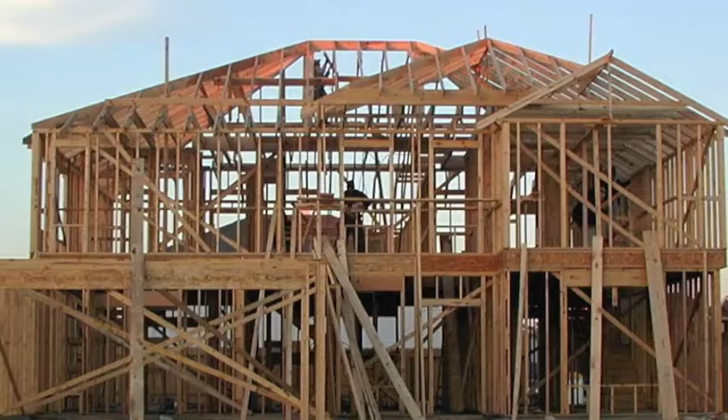Technology is currently growing at an exponential rate, and architectural formations are becoming more complex every day in order to address society's needs. Typically, the use of lumber is reserved for simple residential structures. However, timber has the potential to accomplish the same complex form as most building materials.

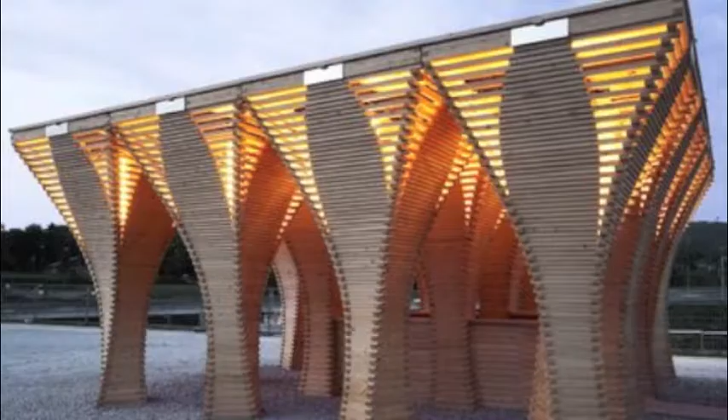There is also potential to take this concept even further by using recycled wood. When used, the difference in each member of the material can begin to not only accomplish a predefined form, it can increase the complexity of the structure. With an increase in complexity, there is an inherent need for a defined process to develop the formation.

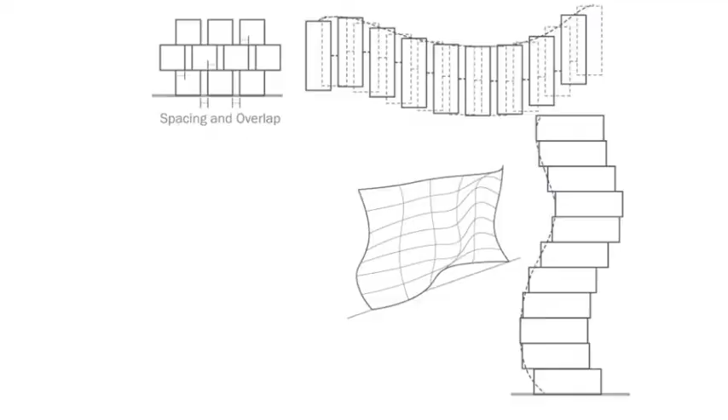The main idea is to organize recycled material, wood in particular, into a performative architectural element. By understanding the differentiation of material, the design of space begins to be informed by the material qualities. With this system, we can achieve mass customization rather than the individual customization of pieces.

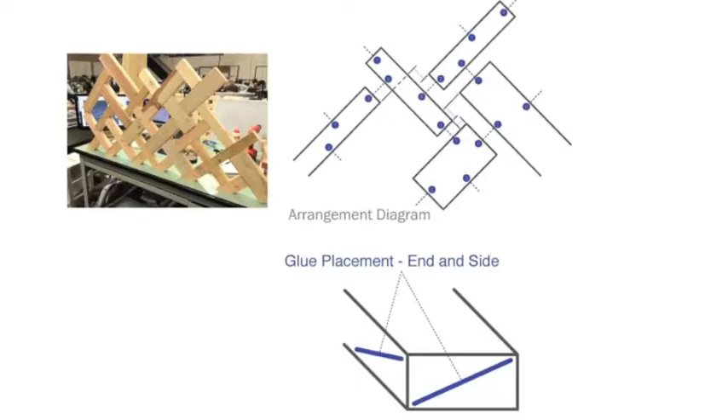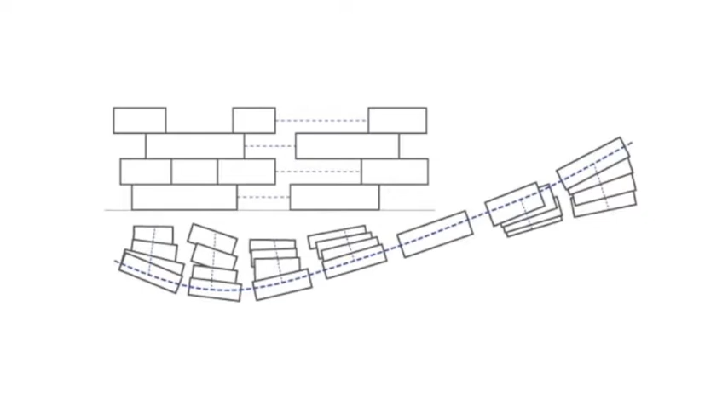To better understand how to account for the variability of the material, a series of prototypes were performed. These range from exploring spatial conditions, attempting to create a form, and testing connections. Each prototype, whether a success or failure, should divulge new information about the potentials of the system. Once there is a better understanding of the parameters of the material, a process can be defined to implement and adapt design based on the spatial needs and material limitations.

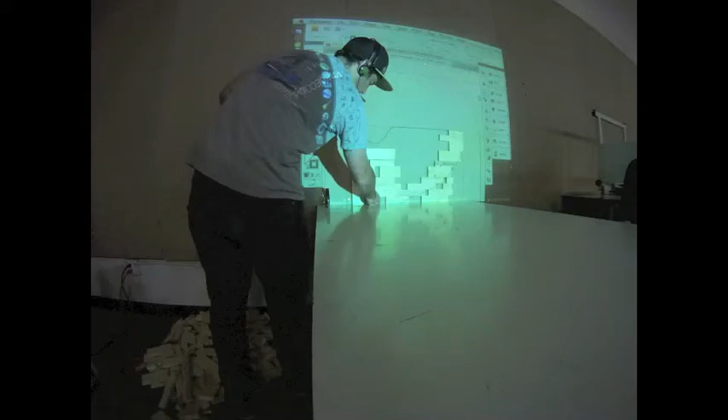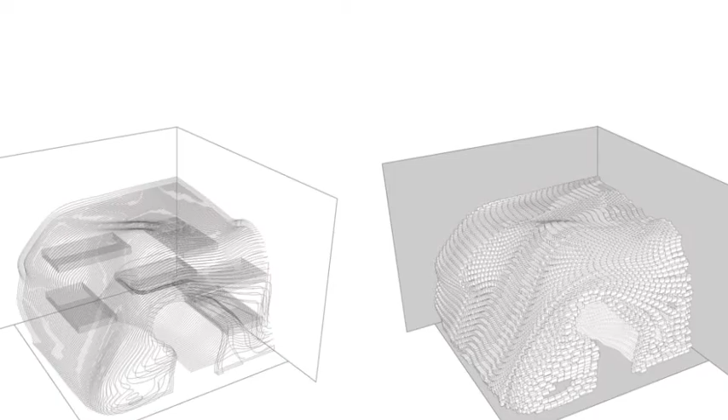After developing the build system quite a bit, the manner in which I could use the process to inform the design began to emerge. This method can be used in several scenarios, such as a shelter condition, for instance, a temporary place for refuge in disaster relief, or for the homeless. Another potential is for interior performative conditions, or as a pavilion in public space. The adaptation of the design depends on the prospective users and how they choose to interact with the architecture.

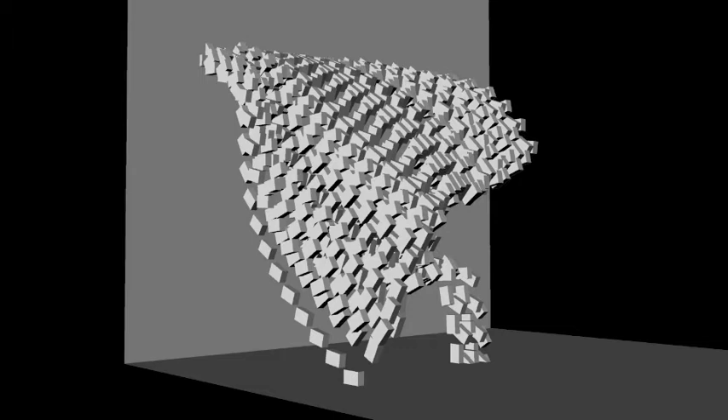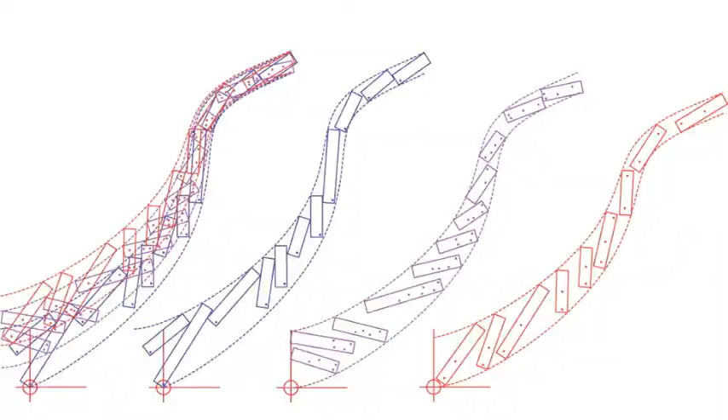During the construction of some of the prototypes, certain issues with the strategy became clear. By doing a full-scale prototype, I directly addressed the problem of material density and time efficiency. Although it was not started with a clear solution, a defined rule set emerged, which helped mitigate both the use of time and material. The strategic placement of pieces and connections will begin to influence the design of future prototypes based on its limitations.

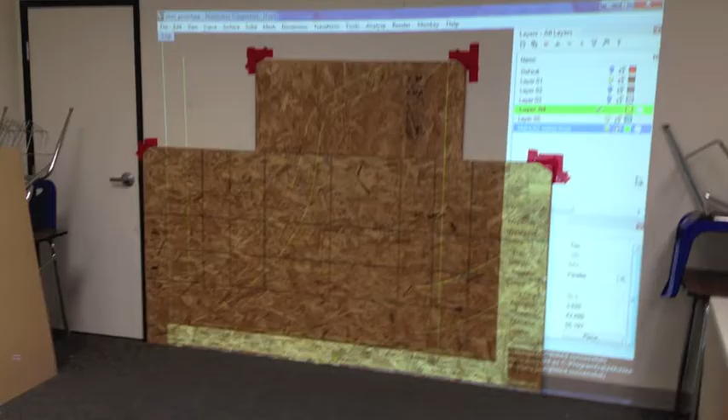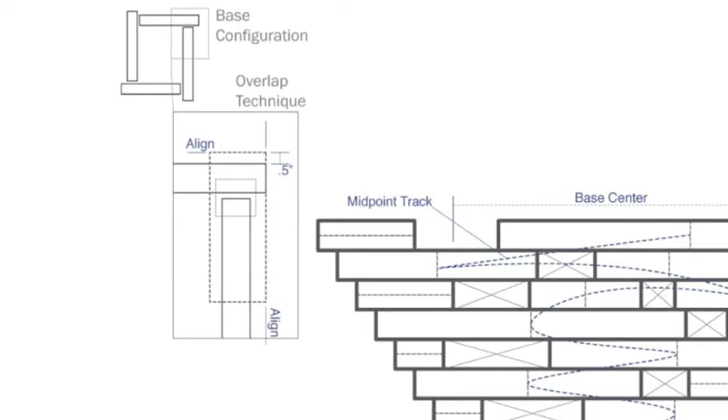Another problem that must also be integrated into the prototypes is structural support. With the improved process, structural integrity is uncertain, so I explored the limitations of several organizations. The key will be to understand the geometry of these columns and define how they can be intertwined into the current process while using the same tools.